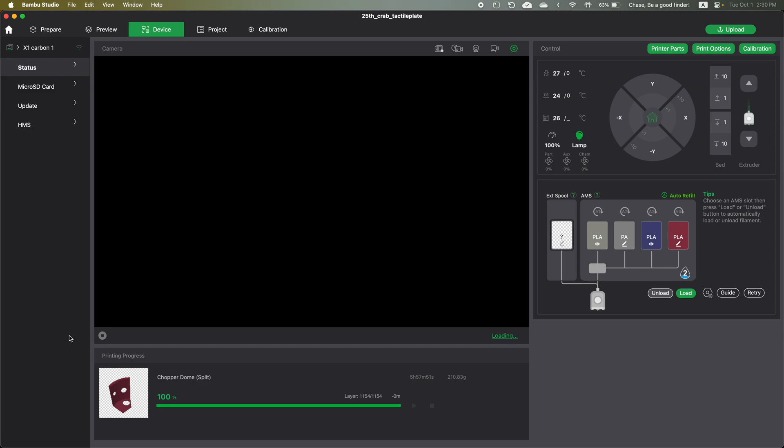The very first step is to go and visually inspect the printer bed to make sure it is clear. You're going to personally do that with your own eyeballs, not with the software, because if you go to device and click this play icon, this is what you might see. You cannot visually tell if this part has been removed from the print bed and if it's clear.

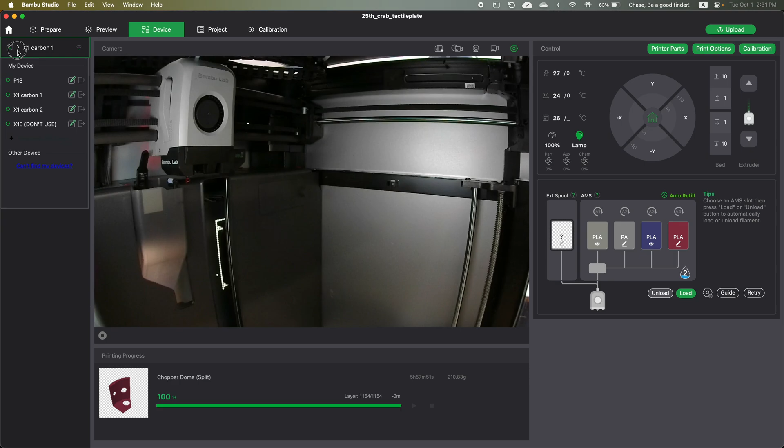If you send a print to this printer and there is a part on the bed, it's going to ruin everything. So you've got to go check it physically, that it is clear. You also want to make sure you have the filament that you want loaded into the printer. There are several printers you can select that have different colors, different materials, and you need to decide what you're going to use.

The first step to loading a print is to go to the Prepare tab and click on this little icon and select the STL files that you want. Remember to export your designs in CAD to the STL format so that you can import it here into the Bambu Studio. I've loaded these two files in, and you notice they loaded overlapping each other.

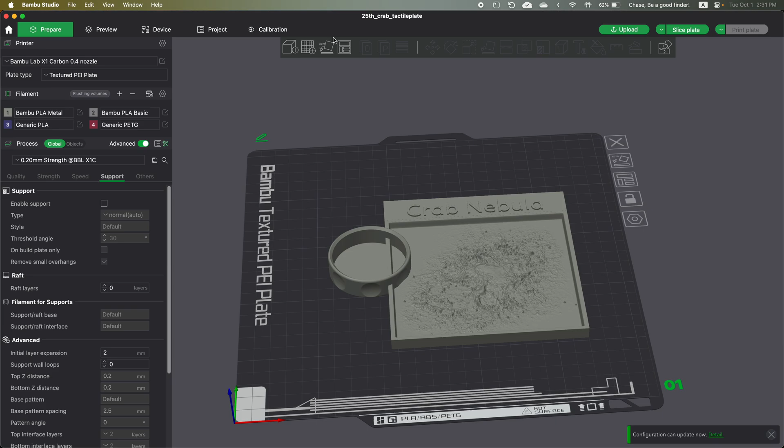So the very first thing I'm going to do is arrange all objects with this little icon. You could also do it with this icon up here, it's the same thing, and it will arrange it very efficiently. It should work most of the time.

The very next thing you're going to do is make sure that you have the optimal layer orientation. Something you should understand, even in the design phase, is that the weakest part of a 3D print is the Z direction, the plane that the print bed moves in, because the layer adhesion is the weakest part of a 3D print.

You could pull and push on a 3D print in the X and Y direction, like pull it this way, this direction. But if you were to pull it apart in this direction, it would pull apart much easier. So you have to consider that when you're designing your part, so that you can design something that can easily print, but that its weakness is covered in the design.

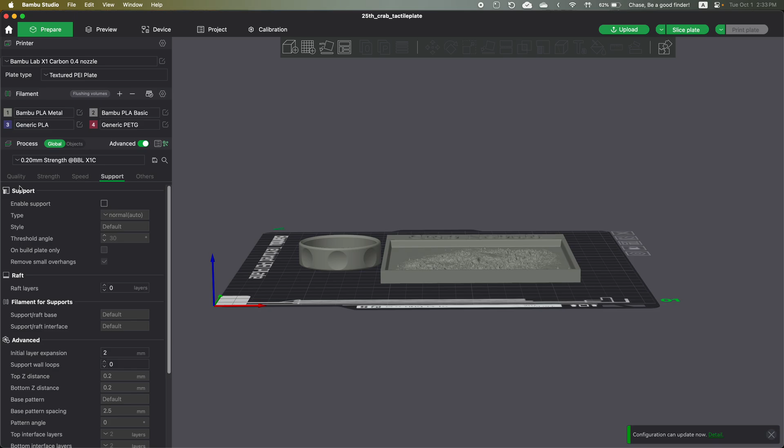So you don't have any weak features that are in the Z direction. I hope that makes sense, you'll understand that as you experience 3D printing for yourself. Make sure you rotate the parts so that they have the best layer orientation and so that they don't fail. You want to have good contact with the print bed.

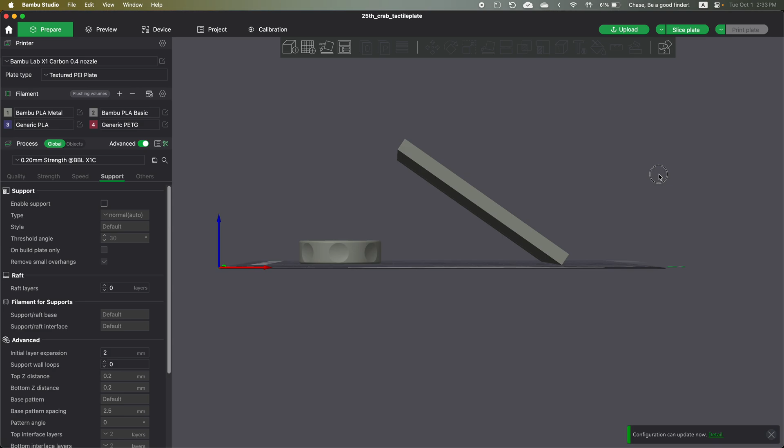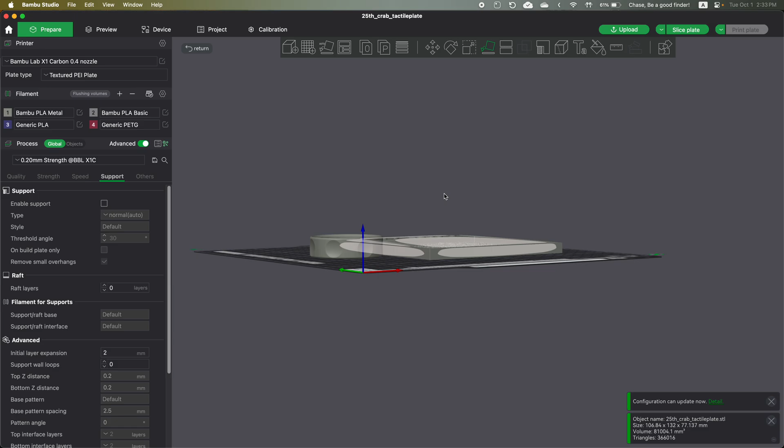If I rotated this because I wanted the best layer orientation for the best strength, let's say I rotate it like that, like this. The problem is that this little sliver is the only thing touching the print bed, so this would be a guaranteed failed print. This would not be the best way to orient this part. I would need to go back and redesign it so it could be more easily printed.

We're not going to get too much into supports, but let's go through all the settings that we might want to use for a 3D print. So the first one is layer height.

0.2, or 200 micron layer height, that is referring to every step down that the print bed makes for each layer. So each layer thickness is going to be 0.2 millimeters. The very first layer, then the second, it's going to build layers that are 0.2 millimeters thick. 0.2 is a good balance of strength and resolution.

Notice how these little divots here for your fingers, this is like a cap that needs to come on and off, but it's going to be a tight fit. So we put these little finger hole sort of grip places. These features are going to be built in the Z direction.

The printer has very good resolution in XY. It's got those stepper motors, and it's running very precisely, but it's got a 0.2 millimeter precision going up and down. So it's going to have a bit of a stair step resolution.

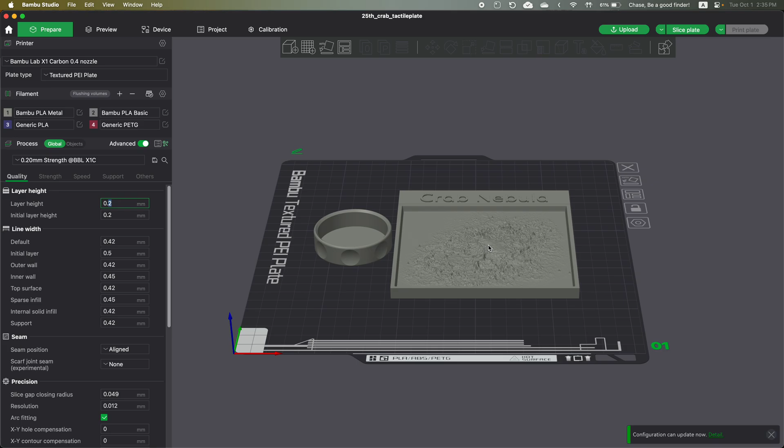If I wanted to improve that resolution, especially for a part where I've got lots of little details in the Z direction, I don't want a bunch of steps. I want this to be as smooth as possible. Then I want this to be a smaller layer height.

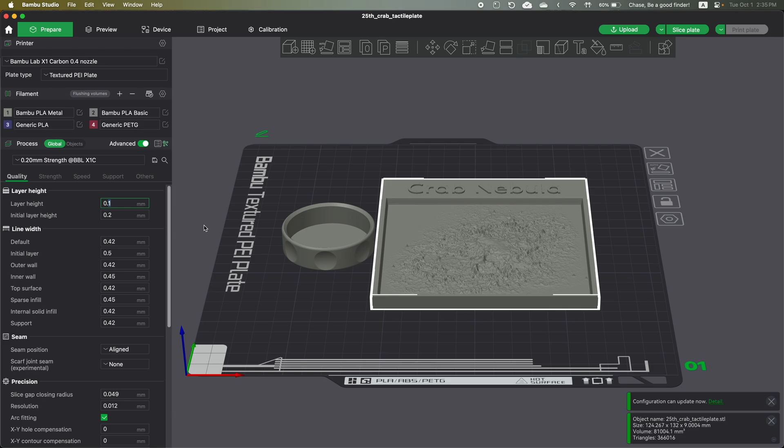But as I go smaller, or if I go too big, that means you're going to sacrifice strength. If we were to switch to a 0.6 millimeter nozzle, we could go bigger than, let's say 0.25, but I think probably 0.25 is the max layer height you should use for a 0.4 nozzle.

What's the next thing? Let's look at wall thickness. Your print is going to have at least 2 wall loops, that would be the bare minimum. And then if you want it to be a little bit stronger, you can thicken up the wall. Now we'll talk about why there are walls here right now.

So you actually print a shell. There are walls, there are floors, and there are roofs. Now this calls it just top and bottom shell.

This is making the box, and really that's all you need for strength. This is a box frame, and your strength is in the box itself. So this is why 3D prints often have an infill density.

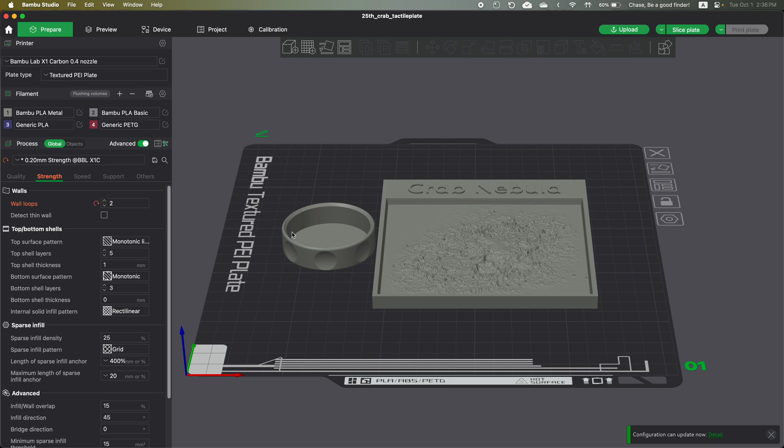There's just a little grid pattern that's printed in the space where the walls don't meet. So maybe this part would be all wall, completely filled because it's just too thin right here. But maybe this part right here would be a cavity where there would be this infill.

25% is another good place to start. You probably don't need to go beyond 40% though. There isn't a lot of gain going past 40% infill.

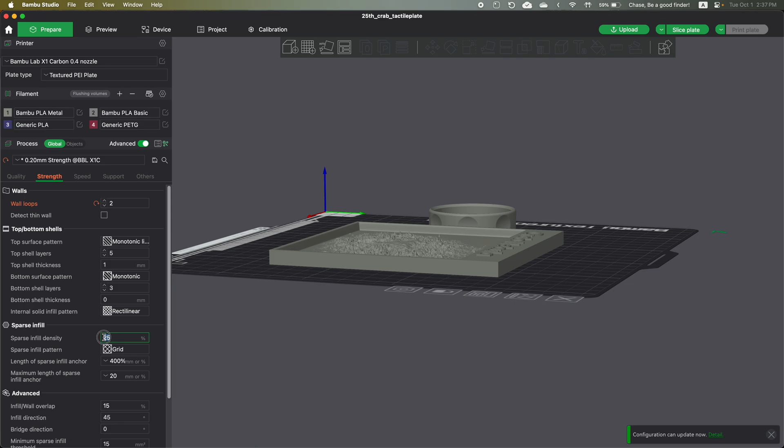So we talked about wall loops. You can make them a little stronger by having more wall, a thicker wall. Also the same thing for a thicker bottom and top, but there's a limit to how much infill density really helps. All right, the next thing we'll look at is supports.

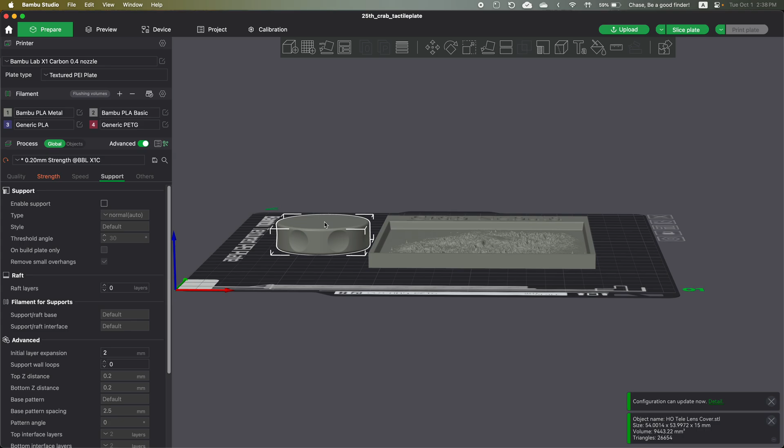If you've got an overhang, let's say we rotate this part upside down. Now we've got that opening on the bottom - we've got this overhang, is what it's called. The printer can't just print that in the open air. If you imagine this print has all these walls constructed, and now all of a sudden it's got to print across the top here, and it's got nothing, no foundation to lay on, that's going to be a problem. It's going to be a messed up print.

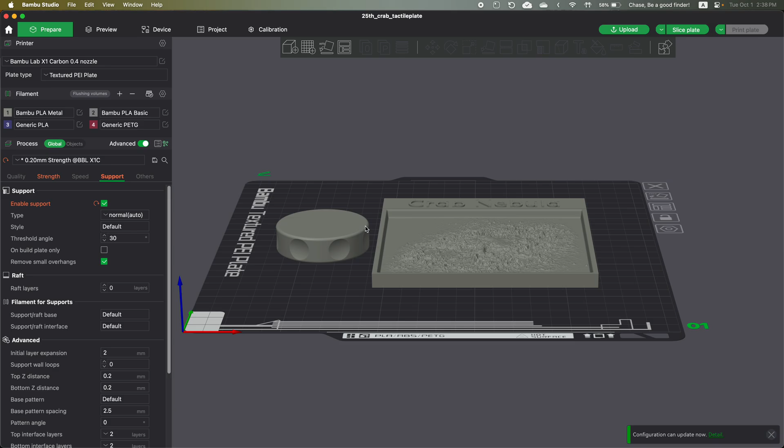So what you need to do is enable support. It will print some material here in the center and go up just barely up to that point where it's going to start going across the top, across the overhang area, and the supports will help for a smoother print.

Rafts are another idea. That's where you can lift up the print a little bit with some material underneath, in case you have a situation like this where I've got a fillet on this side and a chamfer on this side, so it's really just this little ridge - and that's really not enough to contact the print bed and make good adhesion, because the print can come loose from the print bed. When your printer head is going really fast over it, it's going to put a little bit of force on the print on this part, and that could cause it to break away from the print bed, and that would be a failed print.

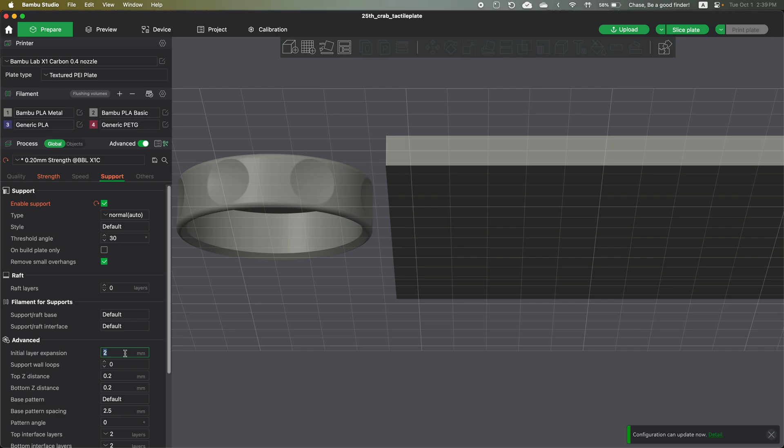So you could use a raft when you don't have enough contact with the print bed. You could add a few layers of a raft, change what kind of filament you have for the raft, and also change how far out your brim or your raft goes. So there's several things you can do to help support your parts and keep them on the bed.

Here are some skirt loops, so you can increase the number of skirts you have. There's some other features you can play with. We're not going to go over all of them, so we're just going to move on here to the next thing, which is changing the filament.

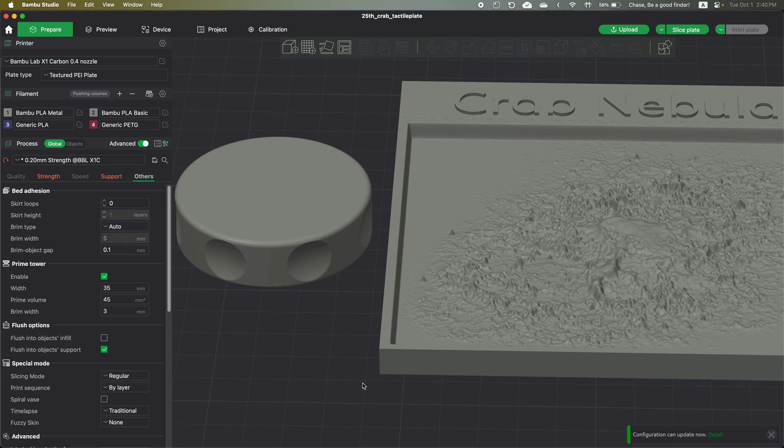By default, whenever you import something, it's going to pick the very first filament in the printer. So if you want to change a filament, you can right click on the part, do change filament, and click on the filament that you want. You could also select all of them by control clicking and do the same thing, selecting the filament you want, let's say basic.

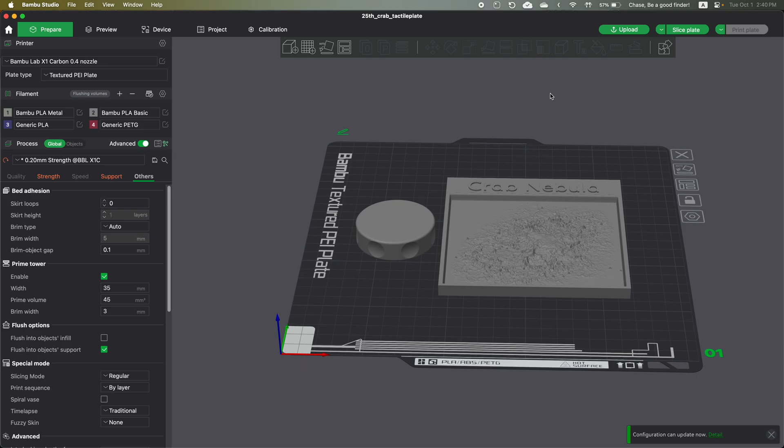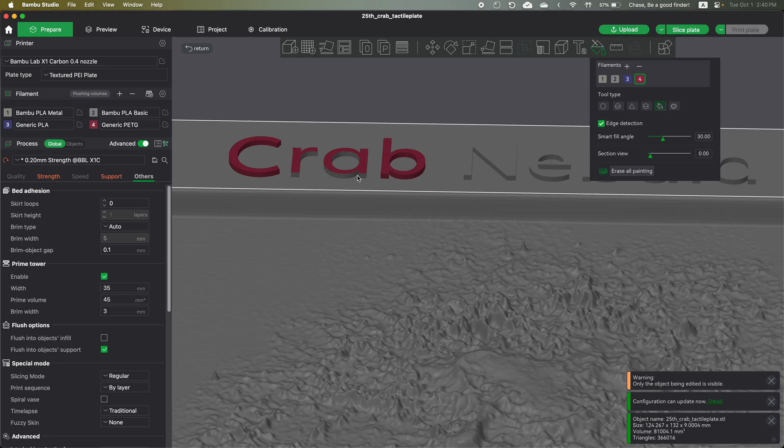But there's also another way you could change filament, and that's called color painting. So with these letters, let's say I want them to have a different color - I'm going to select a different filament and fill in these areas with a different color so that the letters will stand out. This is a pretty cool thing you can do. I'm not going to go through the whole thing, but that's basically what you can do to change the color for text and other interesting features of your parts.

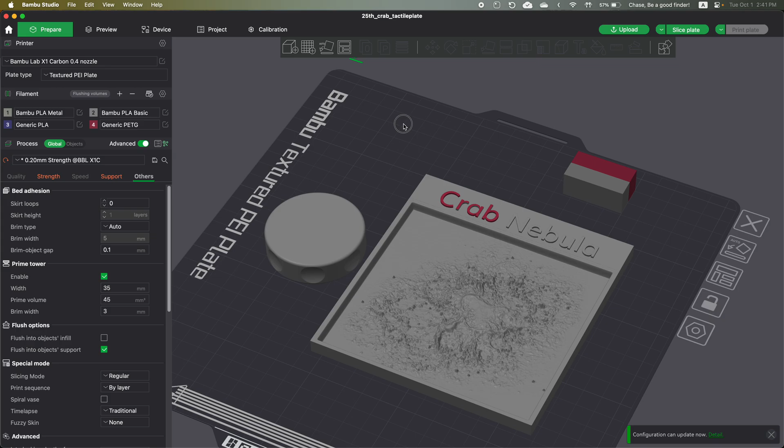Once you do all that, now we're ready to print. Once you have your layer orientation correct, your bed adhesion sorted out, your supports enabled, and you've checked your layer height and wall thickness - all the things you need for your part - we're going to go to preview. The first thing it's going to do is slice the parts, make sure the G-code is going to work out, and we'll see if we have any errors here.

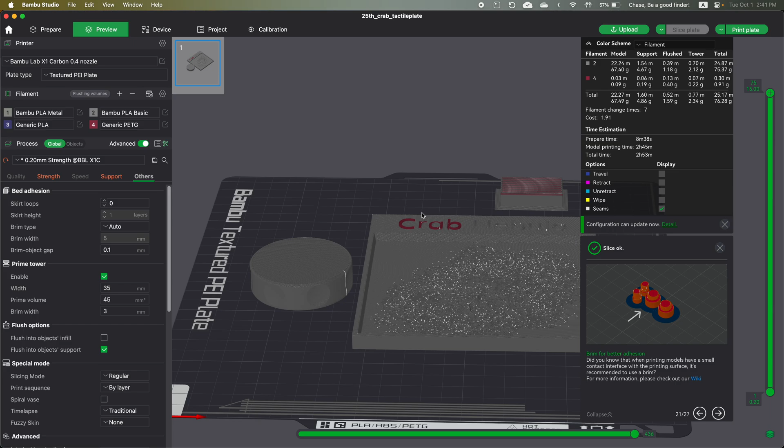All right, it says slice is okay, so we're going to X out of these and close that out. This is a generated thing by the printer because it needs to change what filament it's using - it's got to clear out the old filament and start up the new filament, then start printing, then switch back over again. So this is self-generated here.

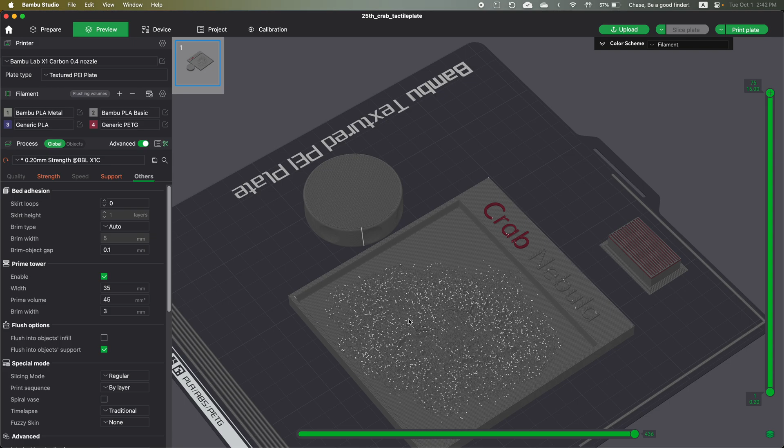But I'm noticing that the resolution on this part is not that good, so what I need to do is go back to prepare and change the layer height to 0.1. Now we'll click preview again.

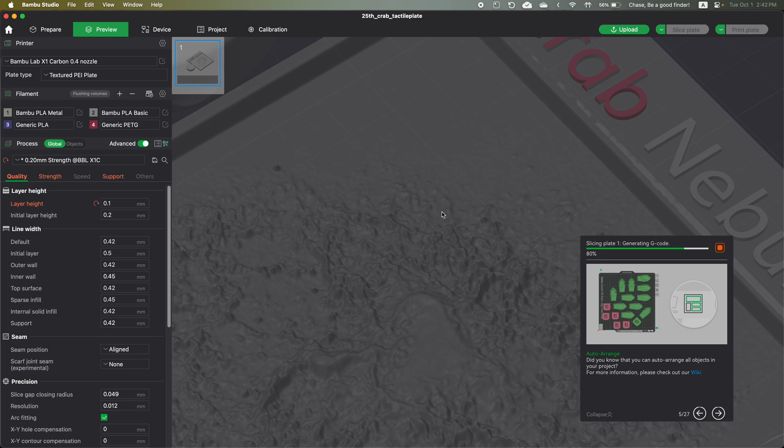And we'll see here - any minute now. Okay, that looks a little bit better. I'm happy with that, so we'll click print plate.

Again, we'll check to make sure we have the correct printer that we checked - we visually checked that it was okay. And we're going to deselect time lapse, we don't need that. And we'll click send so we can send it to the printer and it will start printing. And that's all you've got to do. Hope this helps.